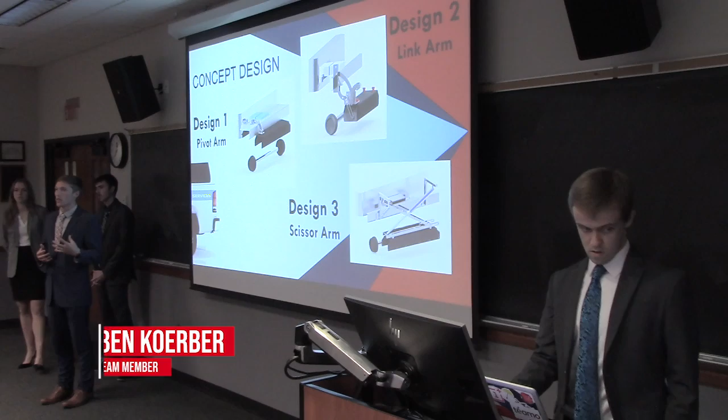Once we started to work on designing this project, our advisor, Dr. Yu, advised us to move into a conceptual design phase where we would start to put together some different designs and then decide which would be the best moving out of that.

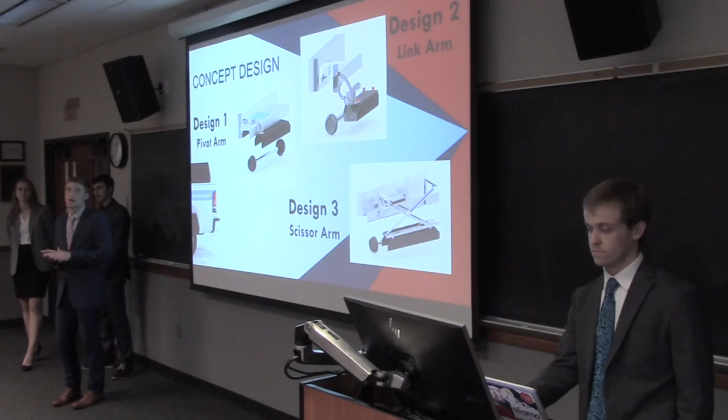Up here we have our three main designs that we worked with, pioneered by Ethan, Dan, and Luke. Ethan's design here is design one, the pivot arm design. It has two interlocking arms, kind of reminiscent of how a plow might be lifted on a truck. The TGMS would sit down in front in its measuring position and then rotate up and face forward on top of the C-channel.

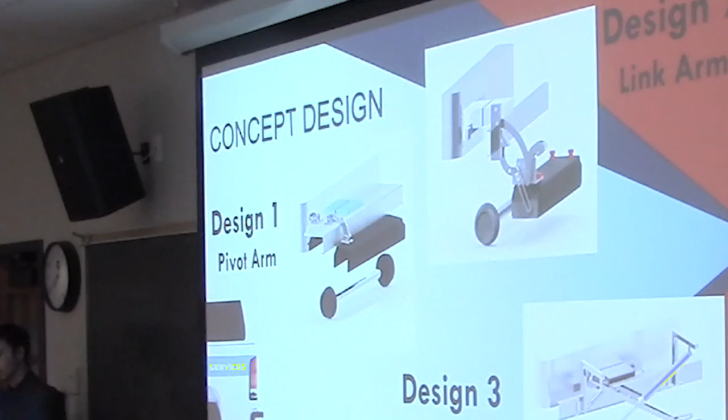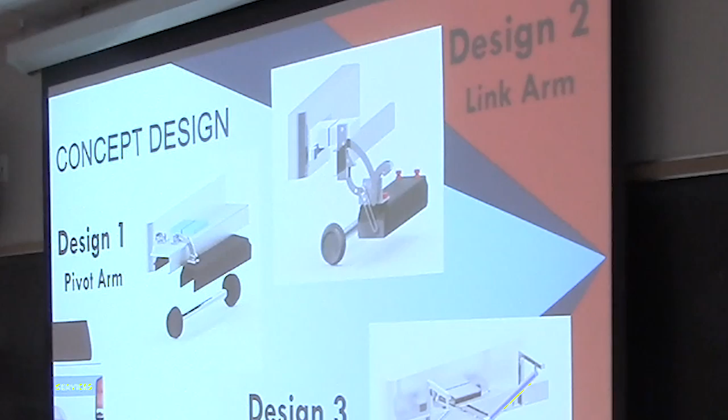Our second design was this link arm design - we also nicknamed it the horse head, since there's a weird looking horse head piece there. That was Luke's design. This one was very elegant in the way it moved, as it would stay facing the ground at all times and work from that position all the way out and around, sitting on top.

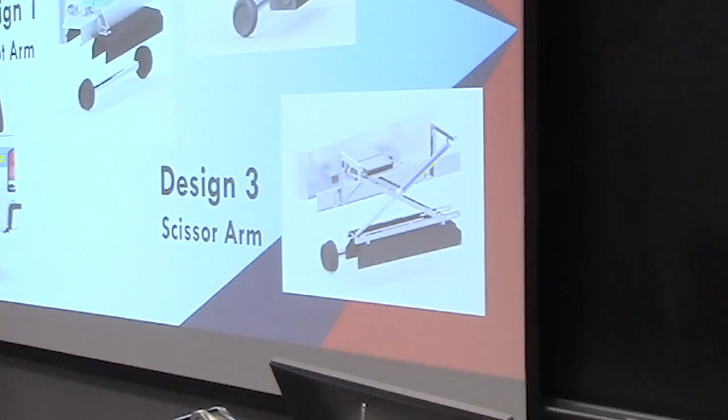The third design we have here is the scissor arm design, the one that Dan worked with. This one had a piston kind of working scissor lift, similar to what you might see on a lift outside, just inverted, lowering it down and up. Moving into which design we chose, it was actually that scissor arm design, the third one we talked about, and we did this for a multitude of reasons.

The main reason was that it was the simplest and easiest to manufacture. It also worked well with how Ron saw this project moving forward. It was the most repeatable, as in durable, and would sit in the right position. It had the most ability to be manufactured and was least likely to impair headlights or the driver's vision.

After seeing that this met our PDS requirements, we decided to move forward with this design. We went through a concept selection process to decide which would be best, with all of our PDS requirements laid out. We decided which ones were most important, then rated each design on those criteria. As you can see, Dan's design, the scissor arm, came out on top.

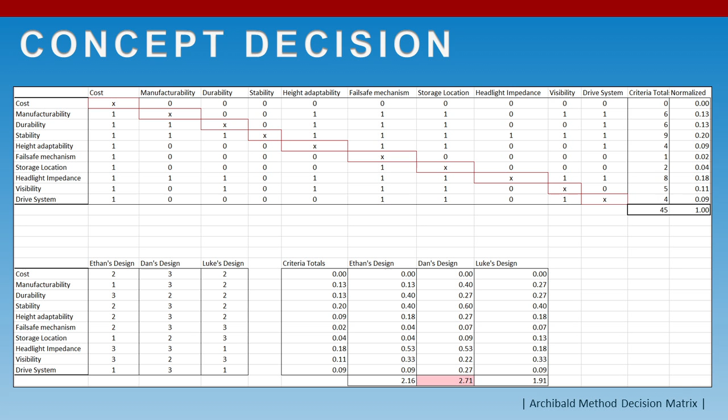In this design, there's a piston in the middle of those two tracks that moves horizontally, lifting it up and down, similar to a scissor lift.

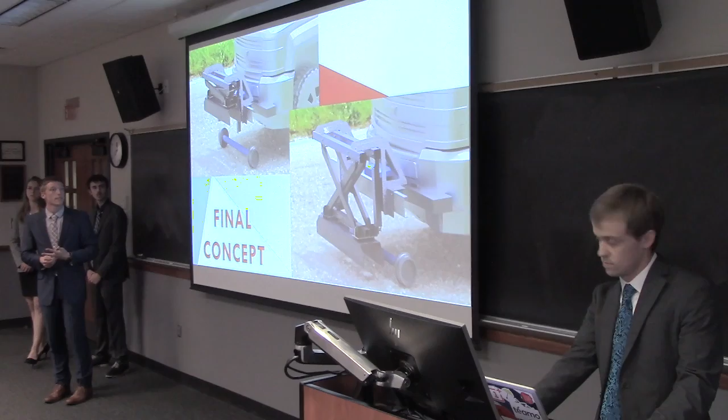After we got our design worked out, which was our first semester's goal, we moved into the second semester, where we started working on manufacturing and actually getting this thing built, to give Ron an example and say, this actually works.

So how we went about that was by splitting up into subsystems. We have 6 subsystems here. One of them isn't really part of our design, but it was definitely something that had to be done so that we could actually make a full working product.

That first system is the mock-up. That was basically a makeshift truck that would have a bumper and hold our whole design, but not take up as much space as a truck, while still being able to hold everything that this Chevy Silverado was able to hold.

The other subsystems we split up among our team members were the mounting system, which were the arms that hold it; the scissor system, which included the scissoring arms and rollers in the tracks; the sliding mechanism, which were those tracks, stoppers, and rollers; positioning, which involved stoppers and the bottom system that would hold it level as it moved up and down; and finally our hydraulic system, which was how we decided to power this.

To talk about that C-channel mock-up a bit, this was an interesting problem, as it had to be lightweight and cheap, but still able to hold this very heavy system we were planning to build. The system ended up being about 450 pounds hanging off the front of that C-channel.

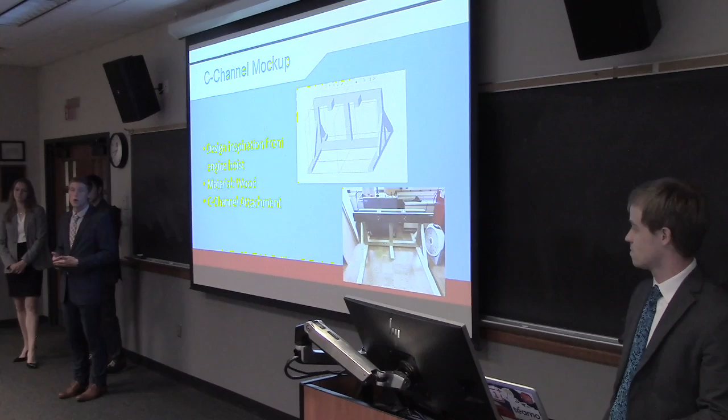So now we'll be moving into some different subsystems here.

One of the main challenges we had to tackle first semester, and a little into second semester, was a proper way to mount our system to the frame of a truck. We don't have time to go over all the iterations we went through during first semester of a proper mounting technique.

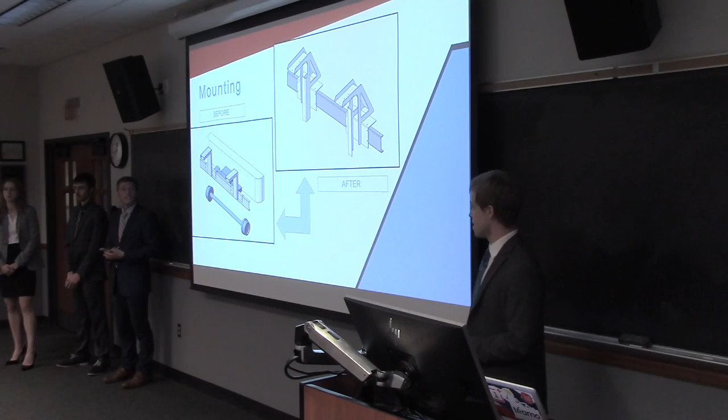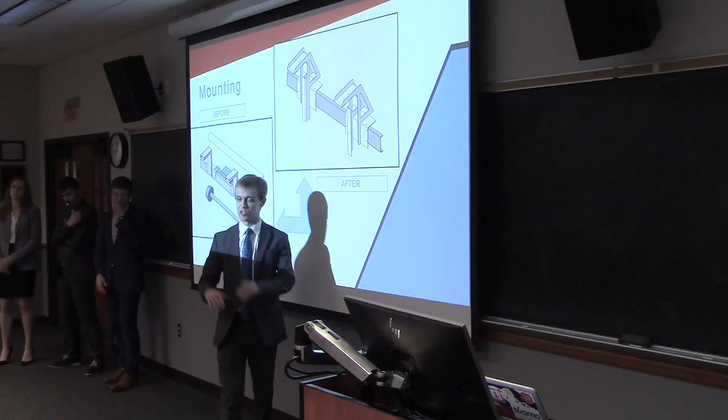As you can see from this before picture, we thought simply of taking A500 steel tubing, running it up and over to give us proper distance above and out from the truck, then welding that to these two brackets through the use of angle iron, and bolting the brackets to the C-channel.

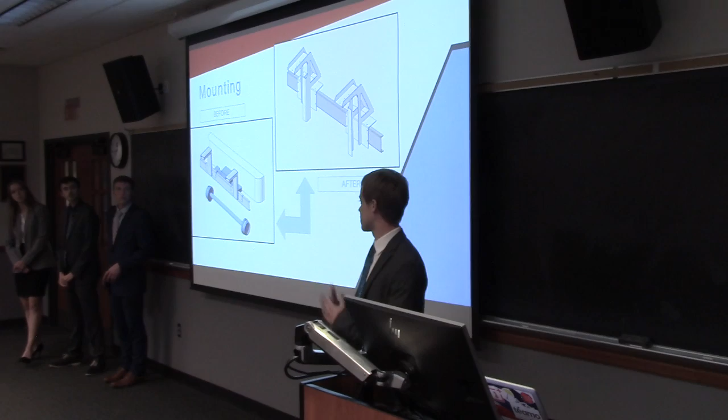In retrospect, there are basically three fatal flaws with that design. First, the A500 steel tubing is relatively heavy, and there's no support at all, so this system is heavily cantilevered, which is a recipe for disaster. Secondly, the brackets don't really encompass the C-channel, they just cover a little section of it. And finally, the four bolt holes are the only thing holding this system up to that C-channel.

So we wanted to address that. It was funny, when first semester was winding down and we were presenting in front of our class, Ethan and Dan said, hey, what if we try these brackets out of sheet metal instead? And that's where this concept came about.

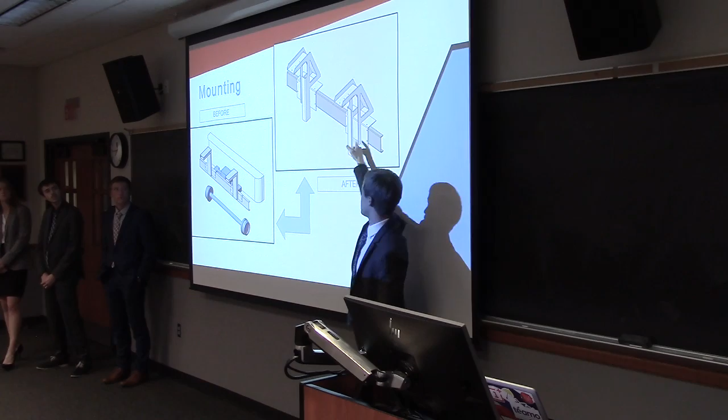This final concept, generated in mid-February, has a lot more benefits than that design. First off, the plate not only encompasses the C-channel, but it extends further and back, and so do the brackets. This adds extra depth. The brackets are welded along these edges, and now the system is a lot more stable instead of just cantilevered as soon as the weight pulls down on it.

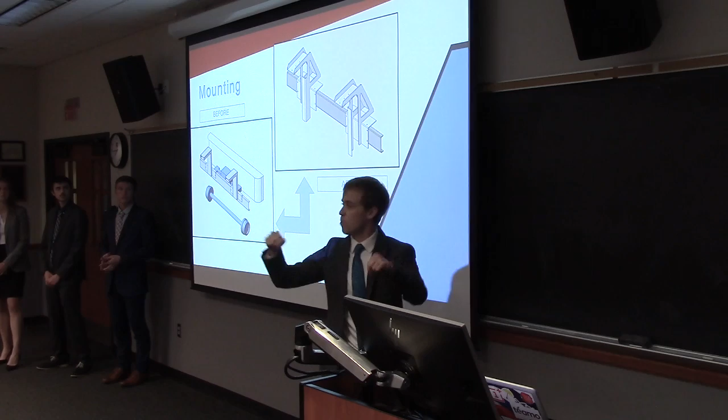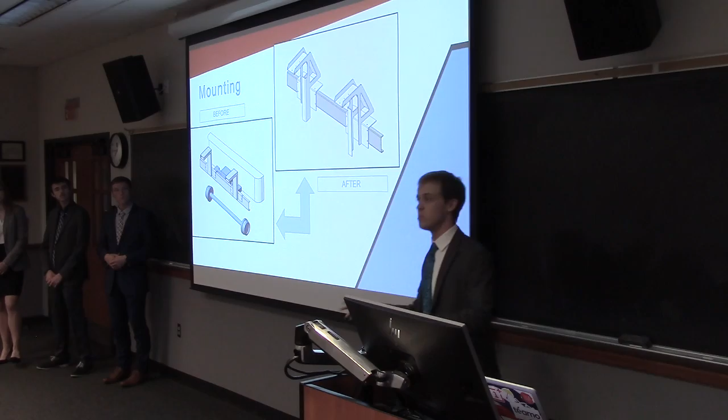Secondly, we added bolt holes so we could bolt into the truck, and using sheet metal allows us to weld much easier and eliminate the use of angle iron as a whole. Finally, Dan will talk about this more later, but these play a crucial role in our design, and if you saw it in Hoyt, you know why — they provide a stabilizing mechanism for our system.

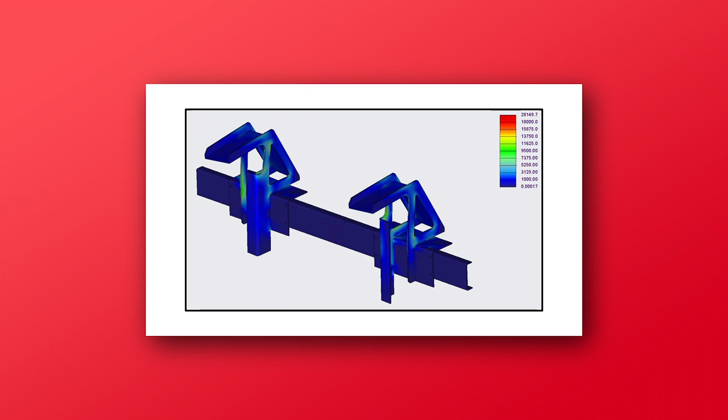As you can see in this analysis, the max stress was 28,000, at the back of the C-channel. But running that analysis again and bolting these to the tracks reduces the stress in the back C-channel to around 12,000 PSI, which was very substantial.

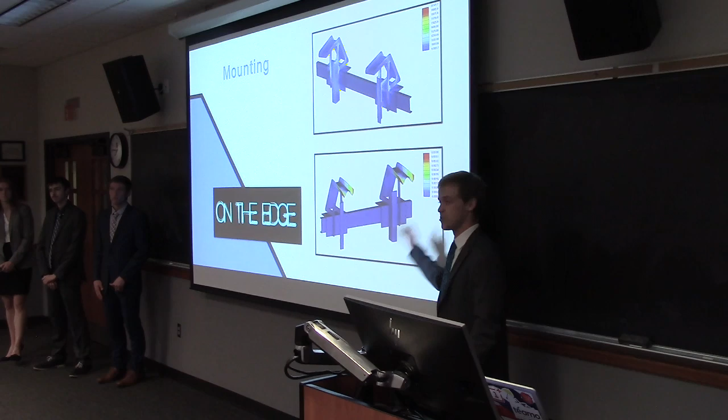So now Luke was up to talk about the slide mechanism. The track and trolley system is what comes next in the assembly order.

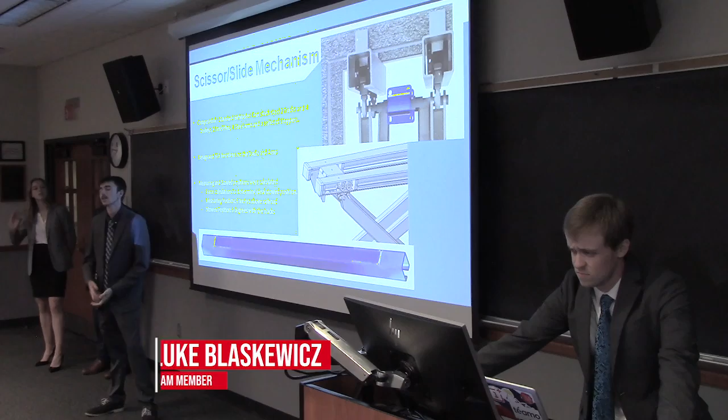This is composed of 2 tracks, 4 trolleys, a series of stoppers and specialized pins, as well as 4 arms.

So the first step that we took with this system was running FEA, or finite element analysis, on the tracks. We wanted to make sure that the trolleys could easily roll through the tracks without being hurt from stress or wear and tear.

From there, we then moved on to the arms. We wanted to solidify what our dimensions were for the arms, because that would determine the positioning of the system. So after we ran FEA a couple times on the arms, we realized that we actually needed to add a little more material around these arms to keep it from failing the stress.

Once we got that length hammered out, we then moved on to figuring out where we wanted the TGMS to stop in its measuring position and its stowed position. ENSCO actually gave us a qualification to follow for a measuring position. We had to keep the TGMS when it was measuring about 6 to 6.5 inches above the railroad track.

So that wasn't too hard to achieve. The tricky part was getting it with the stowed position. We had to figure out the ideal angle that these tracks would meet with the arms. And as these arms come closer and closer to 180 degrees, more and more force is put on them.

So what we ended up deciding for our angle was 6 degrees. This would give it ample spacing and protection as it was stowed, but it would also keep the TGMS and arms not so stressed and fatigued.

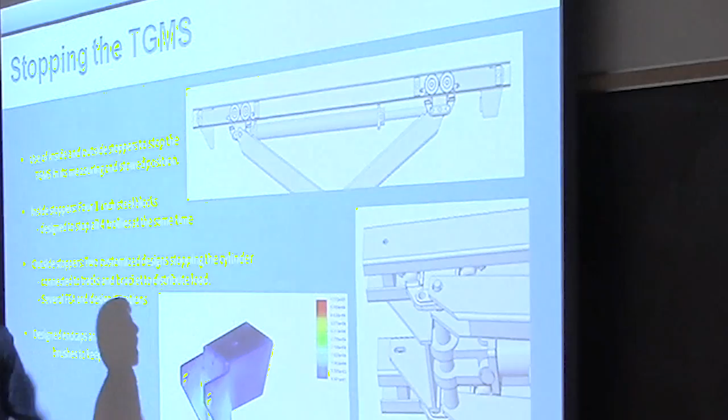Moving on from there, we had to answer the question: how do we stop the TGMS in the measuring and stowed position? So that's where we designed a series of stoppers. For the measuring position, we have 4 1-inch steel blocks, 2 in each track, and these trolleys will slide forward and hit simultaneously each of the 4 blocks, stopping TGMS about 6 to 6.5 inches above the ground or above the railway.

Now moving on to stopping it in stowed position, this was a little more tricky. Instead of stopping the trolleys, we decided we wanted to stop the cylinder. And this required 2 simultaneous stoppers on the right and the left.

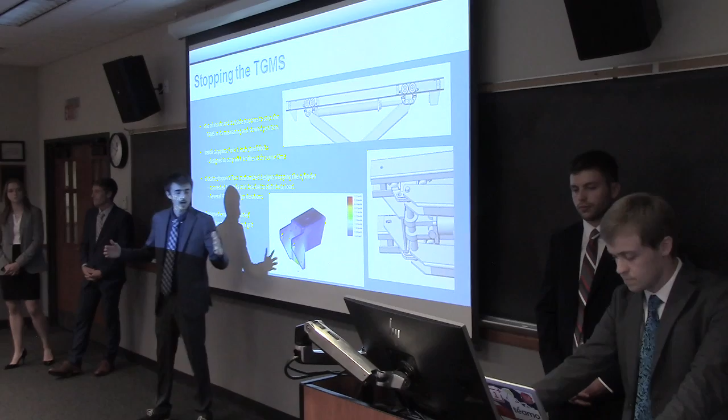And after we ran force calculations and ran FEA a couple of times, we concluded that the best design for this would be to hook the stoppers into the tracks and into the brackets that Garrett had designed. This way the stress would be distributed, and we could be confident that the stopper will be able to hold.

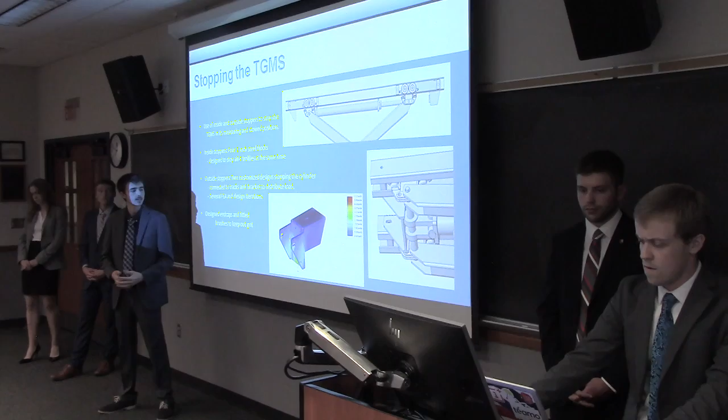Now Dan will talk to you guys about positioning.

The sub-assembly that I worked on this year was the lower mount to the TGMS. When we got this thing, basically Ron gave us this shell, and that was where ENSCO puts their sensors and stuff in. Our goal is to get to move up and down. So in order to do that, we had to find some way to mount the shell onto the arms. This is the system that I worked on designing this year.

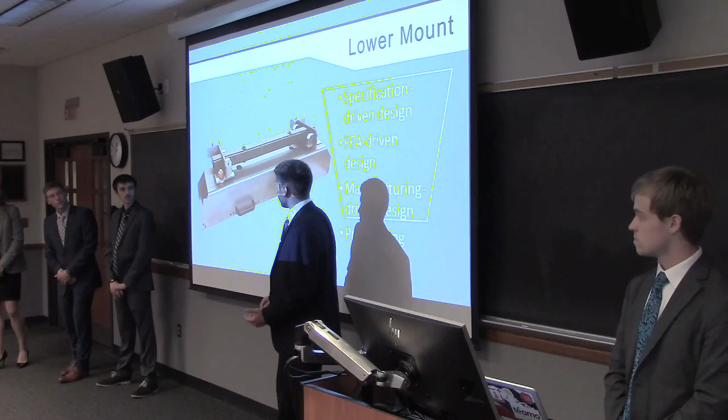Basically, the first phase I went through was based on specifications that ENSCO gave us. In that phase, I was really concerned about features and geometries. Obviously, these different mounting points had to be the right distance away. Another example of a feature would be these rubber isolators had to be there.

So we couldn't just mount this thing and weld it right onto the TGMS. We had to have this lifted off so we could put those rubber isolators in, so that when it's testing the rails, it's isolating the vibrations.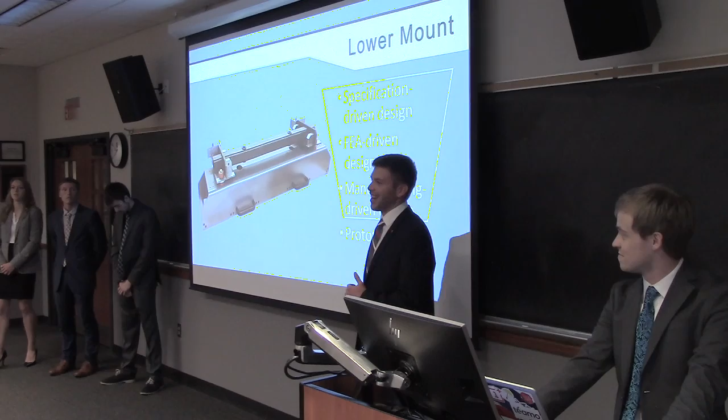That all looked really good on paper, and that's where I was at the end of the first semester. But then there was a problem. What I had made, you can see this is basically what I had there at the end of the first semester. The problem was it wouldn't hold any of the weight that it really needed to hold.

In order to solve this, I attacked this whole subassembly with finite element analysis. We have the parts made on the computer, and then we run simulations where we apply forces to the parts to see where it's weak. Knowing that, I would make design adjustments and go back and run it again. Okay, still too weak in this area. Go back, run it again, so forth and so on.

Finally, I came to a point where I was convinced that the assembly I made was going to stand up to the stresses it needed to in the real world. But again, I had another problem. I couldn't really manufacture it easily. Shops are limited in what they can do, and we didn't have a NASA-sized budget.

So basically, I had to figure out a way that we could manufacture this. For example, some of the sheet metal I had to make thinner so it could actually be bent in a normal-sized shop. Some of the parts I had to rearrange so they could actually get in there and weld it together, so it wasn't blocked by other things. Finally, looking at FEA again along with those final design and manufacturing considerations, I was able to make an assembly that I was convinced would be strong enough and could also be made.

And that is what we had today in Hoyt Hall, the prototype. I'm going to show you a quick video with a lot of the pictures of the different iterations I went through in this design process. Hopefully this gives you a feel for it - it might look simple when you look at it, but this design has gone through maybe 30 or so iterations.

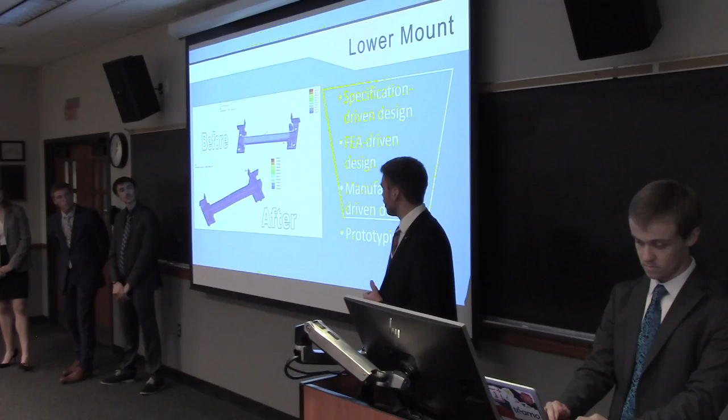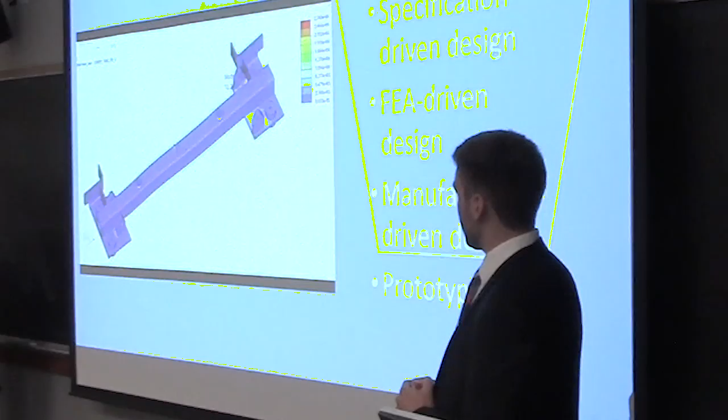So, there's where I was at the end of the first semester. You can see minor changes with that horizontal bar. Now the bar is getting longer, and longer still. You can see messing with the nubs on the sides, messing with supports along those curved braces, different styles for those. Then the middle bar gets thicker, and we settle on a final support system to go across. And that's where it ends up.

Next, I'm going to hand it off to Elizabeth to talk about the hydraulic systems on our model.

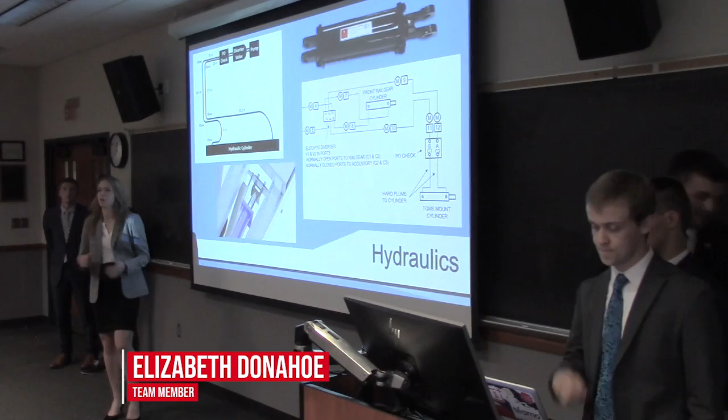So the last subsystem we need to talk about is the drive mechanism. We looked through many different types of drive mechanisms, but we ended up with the hydraulic cylinder. This is just because we integrated it into ENSCO's system pretty easily. It works in all different weather conditions, and it definitely has enough power. The ENSCO trucks actually already have a hydraulic pump on them that's used to push and pull their rail system down and up.

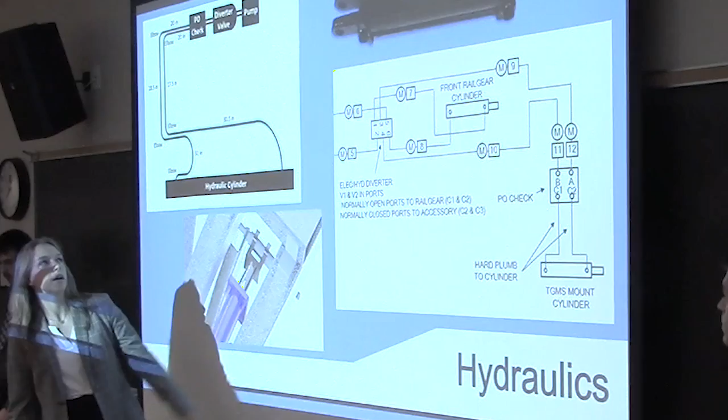We ended up deciding on using the hydraulic system and integrating a diverter valve to get it in there. So you can see this is kind of a drawing of the hydraulic circuit. Here's the diverter valve, and over here is where the hydraulic pump will be coming off of. So the pressure from the diverter valve will push into our cylinder as well as the front rail gear.

Because I'm very conscious of safety, as Ron knows, we integrated a PO check. This is just so if the entire system loses pressure, ours won't fall - it'll stay exactly where it needs to be. Right up there you can see the Maverick 3000, that's the hydraulic cylinder we ended up choosing. It puts out about 3,000 PSI and has a 20-inch stroke length or extension length.

Up here is just an aerial view of the hydraulic setup we ended up choosing. We worked with a company called RJ Hydraulics, which created some custom hoses for us. As you can see, it kind of weaves around and actually goes up the mounting mechanism we have, goes around and avoids all the trolley systems to go into the hydraulic port.

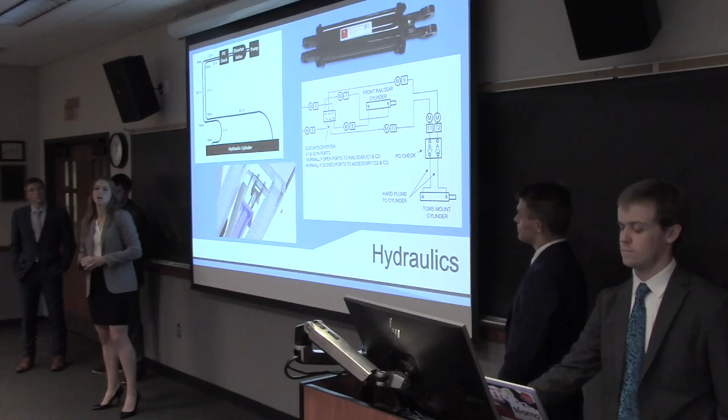As of right now, we actually have the pump directly hooked up to the hoses. This will change whenever we integrate it into the system because that diverter valve and the PO check will be included. Now I'm just going to hand it off to Jake, who's going to talk a little bit about the economics behind everything.

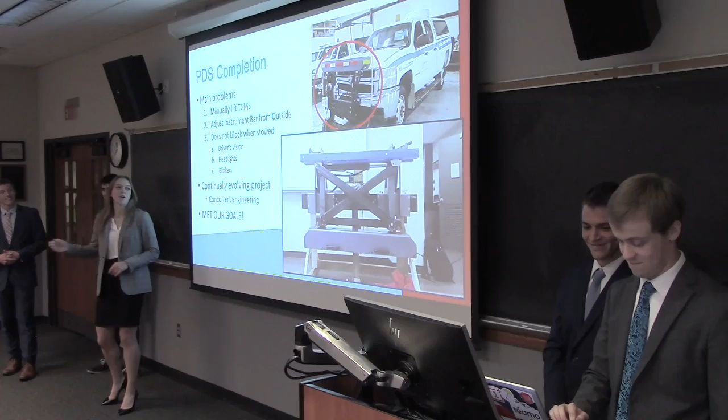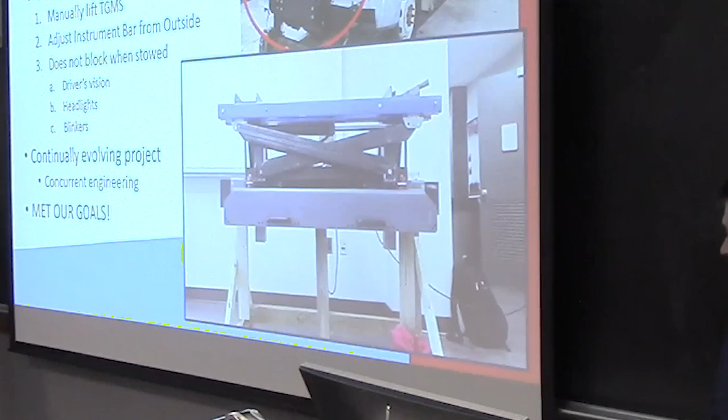Wow. Pay no mind to the people in the background of this video who are not dressed.

To finalize, I just wanted to thank everybody so much. Thank you, Dr. Yu, our advisor. Thank you, Ron Lang, we really appreciate all your work. Thank you to Jim and Kara and all the shop assistants, and Stephanie Adams. We also wanted to thank the two companies, On the Edge and RJ Hydraulics, that we worked with. And of course we wanted to thank all of you for your time tonight. It's been absolutely amazing this semester, and we appreciate you coming and listening to this very long presentation. Thank you so much, guys.

Just a comment, we have Ron Lang with us tonight. Ron, put your hand up so they can see you, he's from ENSCO. Ron is an alum of our program, and 22 years ago he was right here doing this thing, not in this building. Dr. Klaus and myself had him as a student, so we're really happy to have him back, and it makes us feel like 100 years old.

Okay, we have time for a few questions. The question was: the hydraulic cylinder you chose, what advantages did it have over other cylinders you considered?